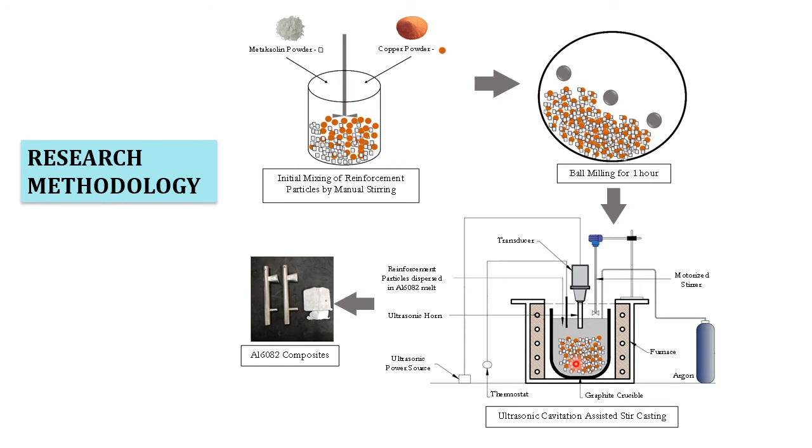So in this particular study, the author has mixed the Metakaolin powder with copper powder, and the mix has been reinforced on the aluminum matrix. So the functionalization, the mixing has been done by initial stirring followed by ball milling, and the premixed powder has been subjected to the aluminum melt, and the composites have been prepared. The details are available in the manuscript.

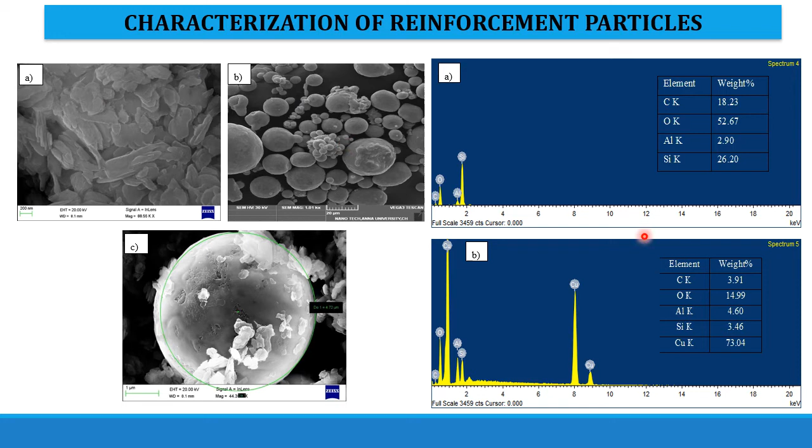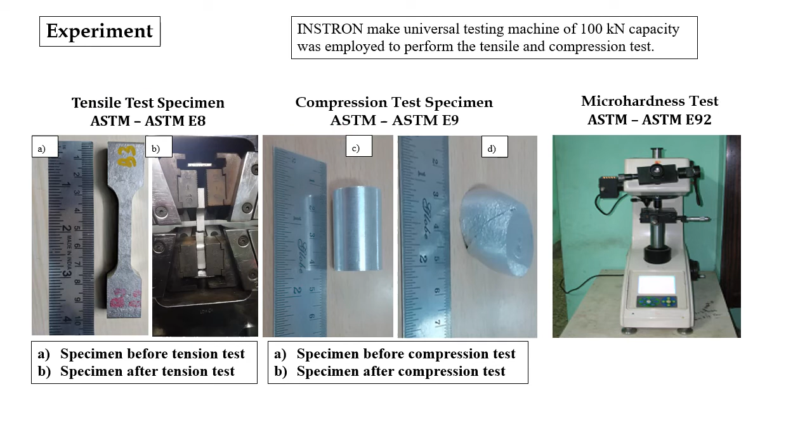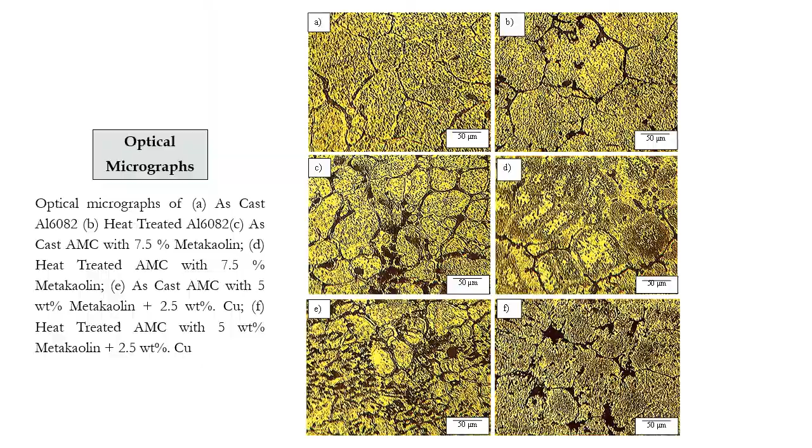The tensile property shows that the composites with metakaolin plus copper particles under as-cast as well as heat treated conditions possess better properties compared to the composites with single metakaolin particles. So the ductility is the highlight fact. So it is observed that there is a considerable improvement in the ductility.

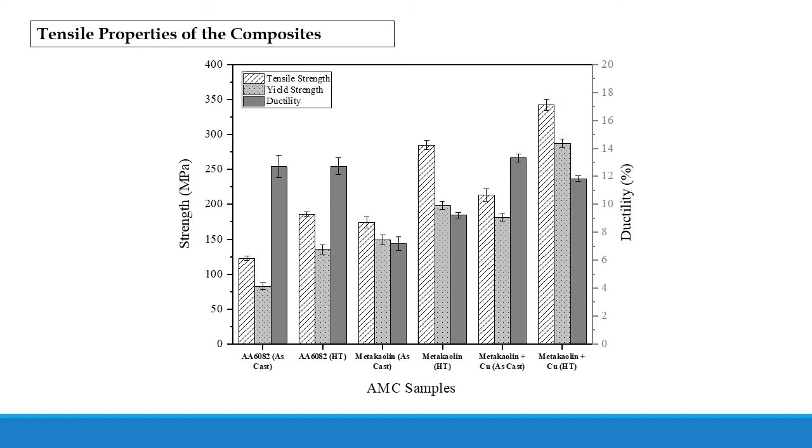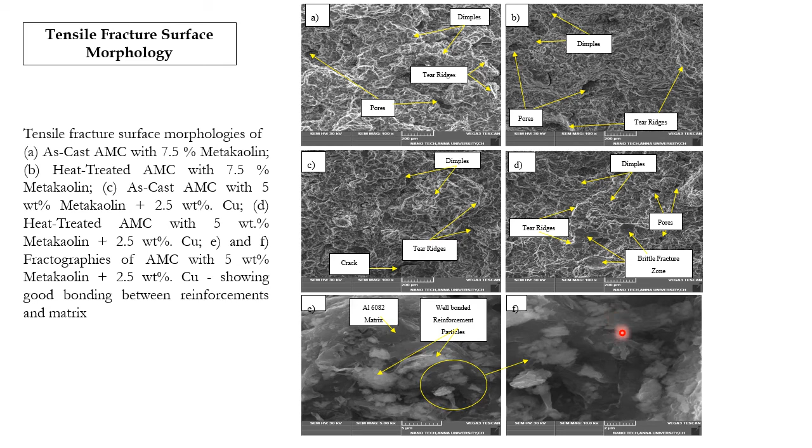So the tensile fracture modes show a mixed mode of fracture that includes tear ridges, dimples, and brittle fracture zones. So a good bonding between the powder and the matrix is also observed from the images. A considerable improvement is observed on the compressive strength as well as the hardness also.

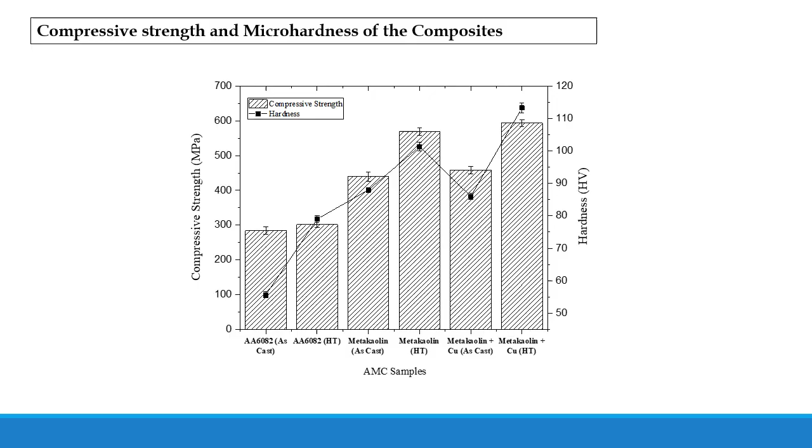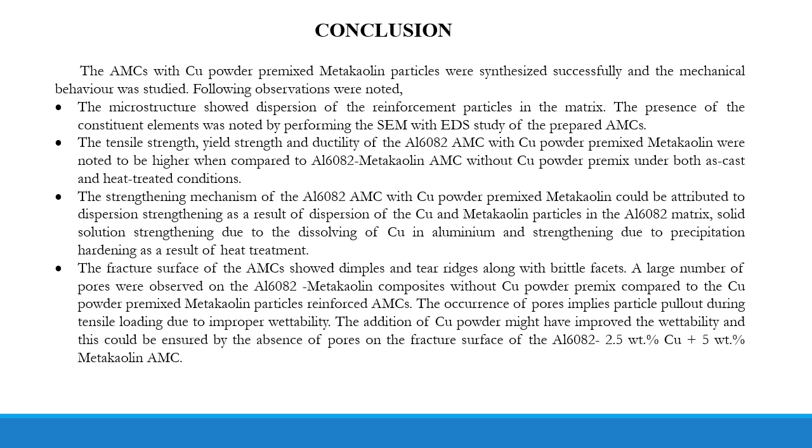From the study, it has been observed that reinforcing aluminum matrix with copper powder premixed metakaolin would improve ductility along with other properties such as tensile strength, compressive strength, hardness, etc. So the detailed discussion is available in the manuscript.